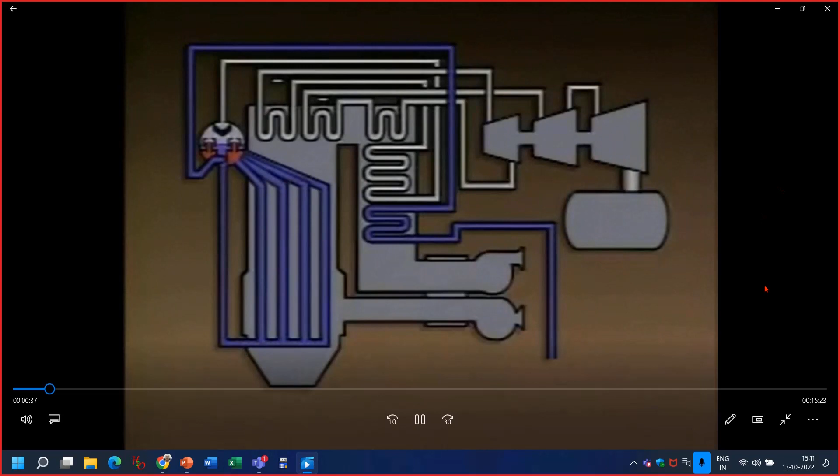In a typical drum-type boiler, the water flow path includes an economizer, the boiler drum, downcomers, headers, and the boiler tubes. The water that is supplied to a boiler is called feed water.

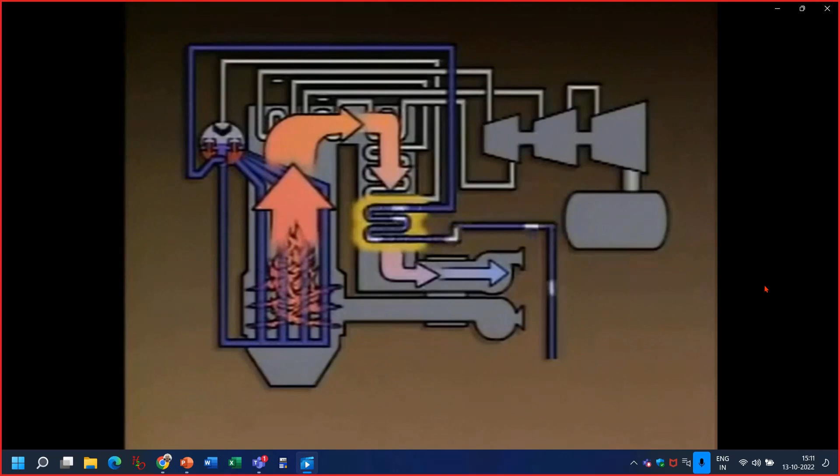The first component that the feed water passes through is the economizer. The economizer uses heat from combustion gases that would otherwise flow out of the stack to heat the feed water. Heating the feed water means that less fuel has to be burned in the furnace to convert the water into steam.

In this boiler, the heated feed water flows from the economizer and enters the bottom part of the boiler drum through the feed water inlet. The water continually circulates within the boiler through the downcomers, the lower headers, and the boiler tubes.

A boiler typically has two or more downcomers and two or more headers. However, for clarity, this illustration shows only one of each. The lower headers supply water to the bottoms of the boiler tubes. The boiler tubes, which line the inside walls of the boiler furnace, are commonly called water walls.

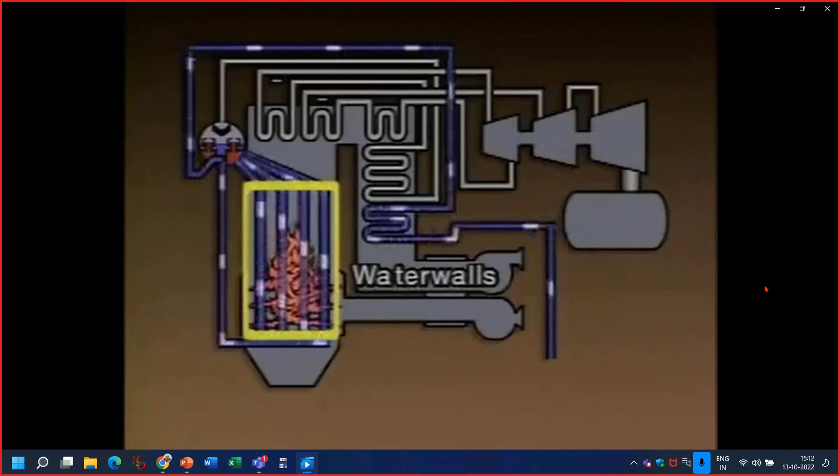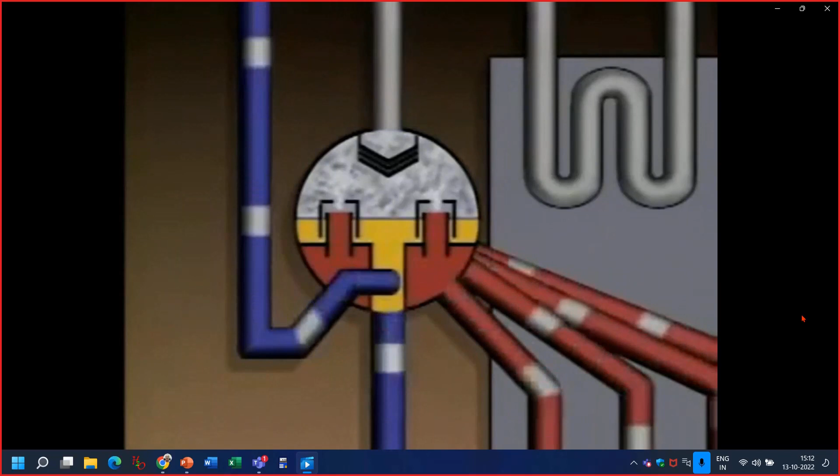The water walls are exposed to the heat produced by burning fuel. As water flows up through the water walls, heat turns some of the water into steam. The mixture of water and steam rises until it enters the boiler drum, where it's separated into water and steam. The steam rises to the top of the drum, and the water remains in the bottom. The water is then available to recirculate through the boiler.

The flow of water through some boilers occurs by means of natural circulation. The key to understanding natural circulation is the fact that cold water is heavier or denser than hot water or steam.

In a boiler, the mixture of water and steam in the water walls is hotter than the water flowing from the drum through the downcomers. This is because the water walls are heated by the burning fuel in the boiler furnace.

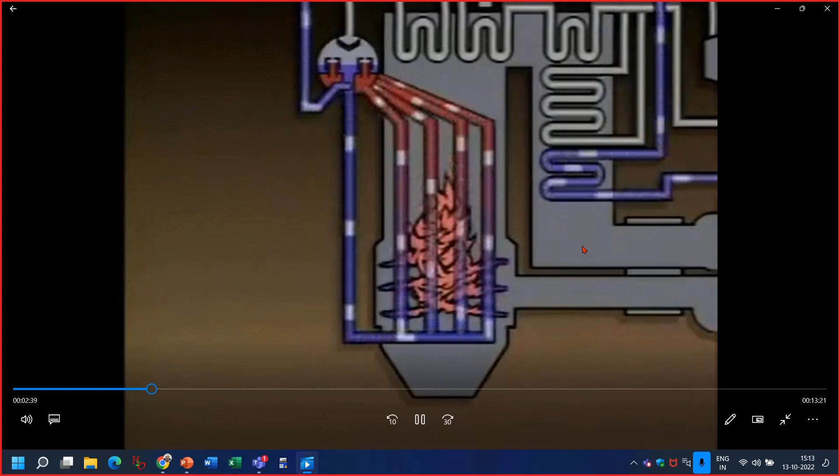As the mixture of water and steam rises, cooler water from the downcomers flows into the lower headers and then into the water walls. The cooler water is also heated and rises, creating a self-sustaining flow through the water side of the boiler.

Natural circulation of water in a boiler is affected by two factors: the amount of heat produced in the boiler furnace and the pressure at which the boiler operates. For example, raising the temperature in the boiler furnace increases natural water circulation.

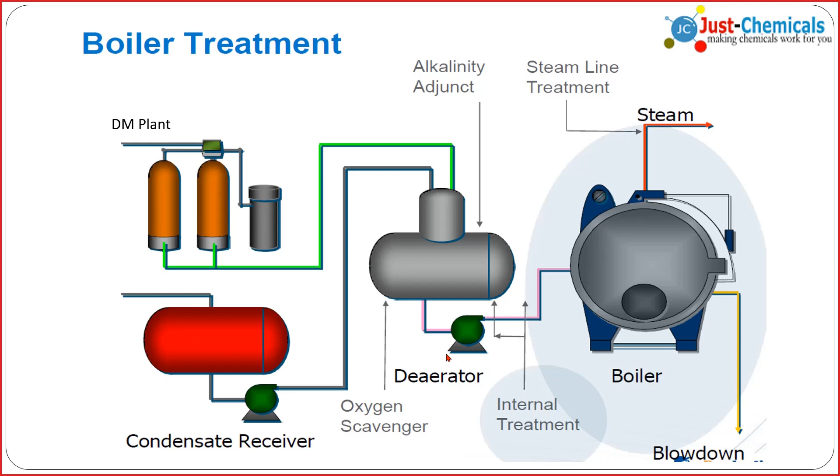So that's how we go with the system, that a boiler water chemistry or power plant chemistry system always will consist of one DM plant, a water treatment plant consisting of anion, cation, or RO, MB or RO-EDI, something like that, which gives the boiler makeup water to the boiler, and the boiler will generate steam to run the turbine. This is a very common picture of a small boiler, but you may be running higher pressure boilers, maybe 100, 120, 135 kg pressure boilers for your plants.

Your cement plants normally have a problem of cycling, which we call sudden pressure. One kiln is down, so you have to reduce the boiler steam generation, and there will be a sudden drop in pressure and everything, and then you have to bring it up again. So ramping up and ramping down time is a problem for a cement plant. I've seen a few plants where there are 4 or 5 kilns, and even one kiln down means they are already 25 megawatts down. That is one of the problems you may be facing, which I know.

But there are several other problems in any power plant chemistry, in the water treatment department, and in steam water cycle chemistry. Today we'll mainly focus on the steam water chemistry, and then I will also take your questions one by one within this time frame, so that we can talk upon that.

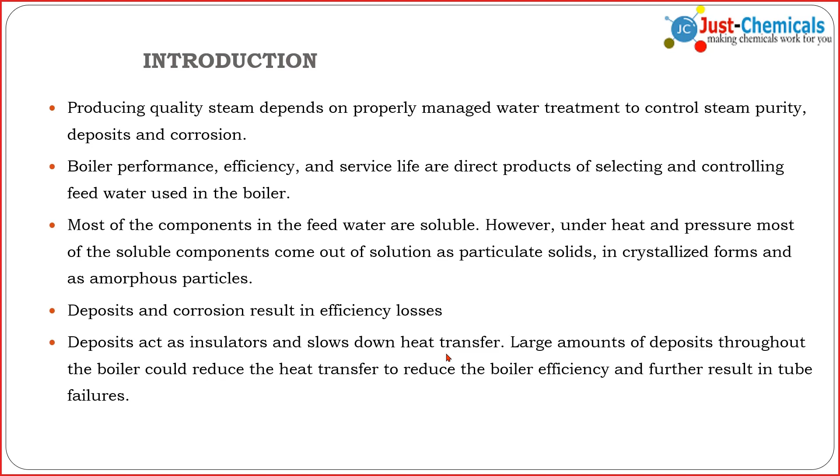Now we'll talk about some important points in steam water cycle chemistry. We know that deposits and corrosion result in efficiency loss of a boiler, and deposit and corrosion on the turbine blades also cause loss in efficiency of the turbines.

The first point you must know is that EPRI is the standard for all power plants—Electric Power Research Institute America—which also governs NTPC water chemistry, and not only water chemistry, NTPC follows EPRI for all mechanical, C&I, and everything. Before 2003, we were following VGB Germany, and that still exists. VGB is also a standard company which Europe follows entirely, and Europe and some part of Australia still go with VGB.

Though VGB and EPRI are not very different, both will say that DM water will be called DM water only if the conductivity is less than 0.1 microsiemens per centimeter in the online conductivity meter. So if you have 0.2, 0.3, 0.4 microsiemens of conductivity in the DM water in the online conductivity meter, that means you are actually not having technically correct DM water with you. That is the most important point which water treatment fellows will not tell you, because either they themselves may not be knowing, or they may be hiding it from you.

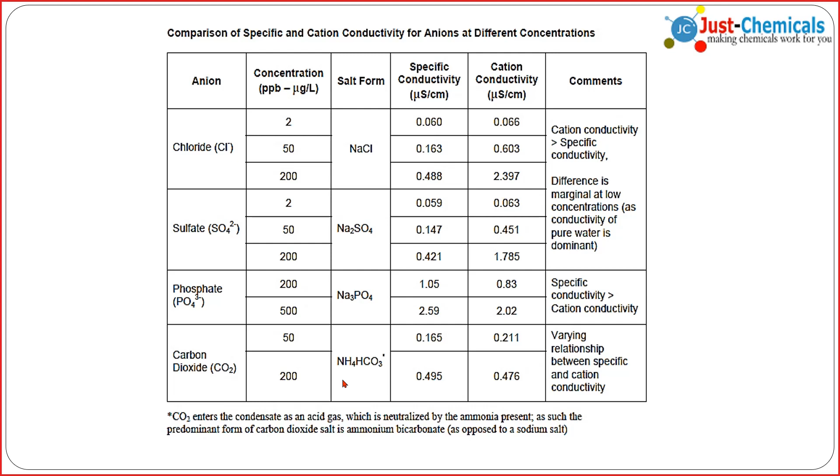So these are the four contaminants which are very important, and here is the relationship. Once you get these slides, please make it convenient for your people also to know what contaminants can do to your conductivity. But from all these things, the important point to note is your DM water will be called DM water only if it is having 0.1 microsiemens per centimeter of conductivity. If it is having more, that cannot technically be called DM water.

Here is another chart which tells you concentration versus the cation conductivity. If there is 16 ppb of chloride, the cation conductivity could be 0.2. Sulfate at 21 ppb will cause a cation conductivity of 0.2. Similarly, from acetate and formate - from where can these acetate and formate come?

It can come from morpholine if you are adding it in the system. People make this mistake regularly because of lack of knowledge that morpholine thermal degradation will give acetates and formates in the steam water cycle, which are actually corrosive to the steam water system. So acetates and formates come from your morpholine, or if you are using other cyclohexylamine, or MEKO or DEHA - at that time also these will increase the conductivity. So we will never be able to reach below 0.2 conductivity when you are using morpholine, cyclohexylamine or DEHA. So believe in simple chemistry.

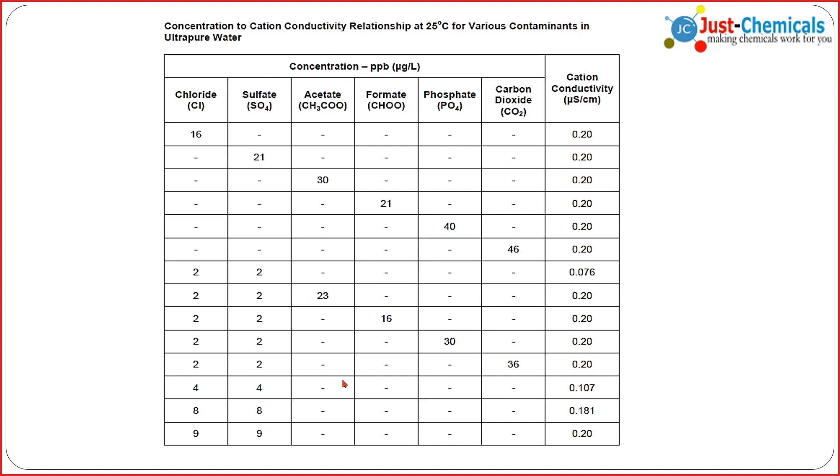Then phosphate, if it is there at 40 ppb, can raise the cation conductivity to 0.2, and carbon dioxide at 46 ppb can raise cation conductivity to 0.2. These are reference slides for you which you can use, and you can also make algorithms like me to figure out what could be the possibilities.

Now coming to the center, the core of the training - there are two important types of treatment: one is internal and another is external. First is external, like demineralization. There could be several configurations depending on the raw water quality available. The plants which are near the sea would be having a desalination plant followed by second pass RO and then followed by a mixed bed, or maybe a train of cation, anion, mixed bed

with a degasser. Whereas the hinterland plants, like those in Tadipatri, they may be using surface water and may have a conventional DM plant, or otherwise they can have RO plus mixed bed or RO plus EDI. Like in the Hyderabad region, most of the pharmaceutical plants are having RO and EDI because they want ultra pure water. Even the steam water cycle also requires ultra pure water. So now the trend is going towards RO and EDI. EDI means continuous electro-deionization system.

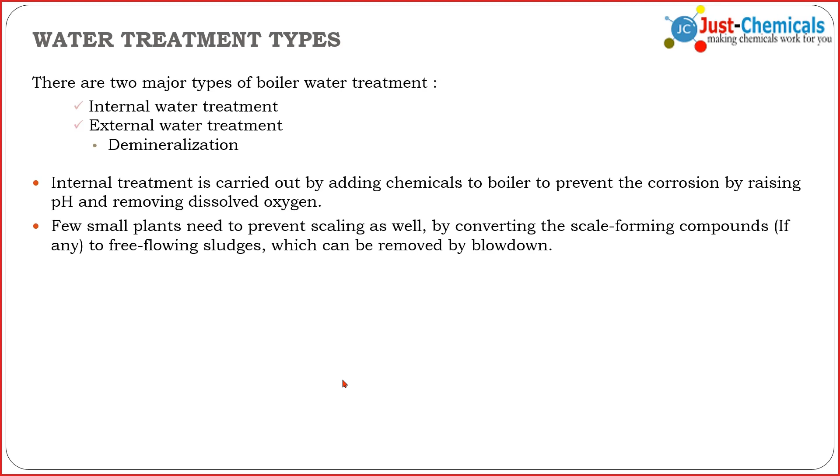Now we go into the external water treatment. The external water treatment may be having ion exchanger, a demineralizer, or a reverse osmosis.

I hope you all know how the ion exchanger works. The ion exchanger works as cation and anion separate resins are used. The cation resins will exchange cations from the water. Like if the salt is NaCl, the cation will be sodium Na and the anion will be chloride Cl. Similarly, if it is calcium carbonate, calcium will be the cation, carbonate will be the anion.

So ion exchange resins are also having two types. One is cation and one is anion. Cation resin will take care of the cations. It will take the cations from the water and release hydrogen in the water.

Cation is placed before anion resin beds because for exchanging anions, the anion resin will need some mineral acidity. It cannot simply exchange anions from the water when bigger cations are also available. So people ask this question many times, why cation resins are before anion resins? The cause is that anion exchanger needs mineral acidity to exchange the anions, and that is why the anions are placed after cations.

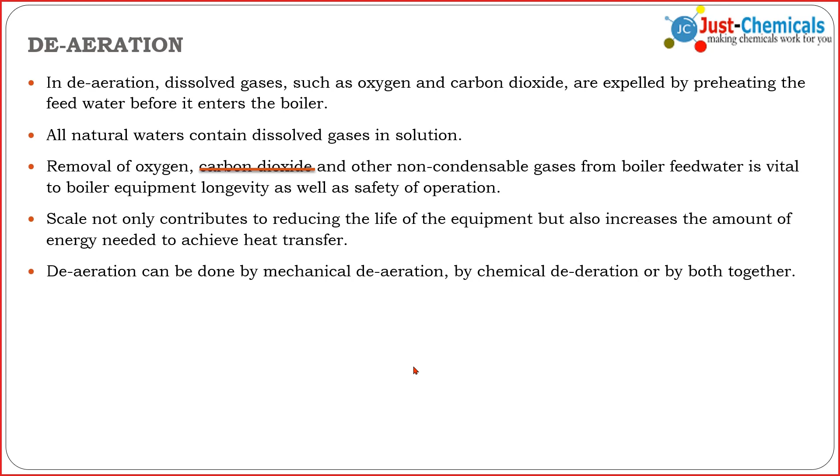Now, mechanical deaeration, as I told you, makes it very much possible to get very low ppb of oxygen content from the deaerator, especially the pressure deaerator. In modern times, deaerators are designed so that outlet oxygen should be less than 7 ppb. The vacuum type deaerator works at about 82 degrees centigrade and can reduce oxygen content in the water to 0.02 milligrams per liter. Vacuum pumps are used to eject the steam required to maintain the vacuum. The pressure type deaerator works at more than 105 degrees centigrade and can achieve an outlet oxygen content of around 5 ppb, or 0.005 ppm milligram per liter.

Then you may ask, why do we need chemical deaeration in that case? Yes, your question is very correct. If we are achieving the desired oxygen level in the deaerator itself, why do we need chemical control for scavenging or deaerating the oxygen? We may actually not require it, if we are measuring at the inlet and outlet. But still, to maintain that magnetite layer intact, we need about 10 ppb only.

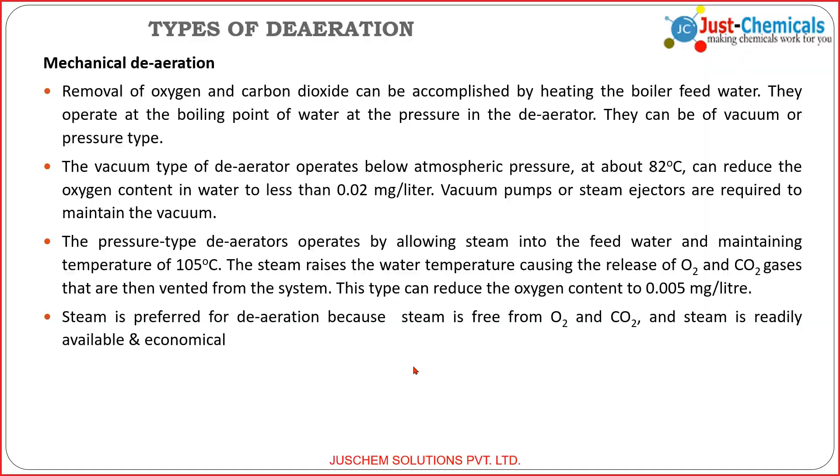Now, when we talk about this, we should also talk about... hello, somebody is actually unmuted. No, his background sound is coming. May I request him or her to please mute themselves unless you have a question to ask. You can ask any question at any time. Nak ma'am, would you please mute yourself? Nak ma'am, can you please mute yourself?

All right, we go back. So steam is actually the preferred deaeration method in mechanical deaeration systems. Steam is pushed from below, from the spargers, into the incoming water, so that it can remove the CO2 and O2. That is what mechanical deaeration does. CO2 can only be removed from the makeup water, not from the water which has already formed ammonium carbamate.

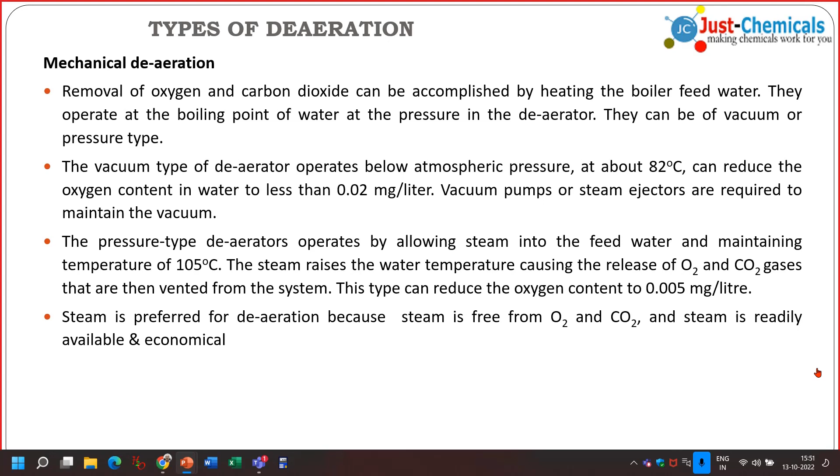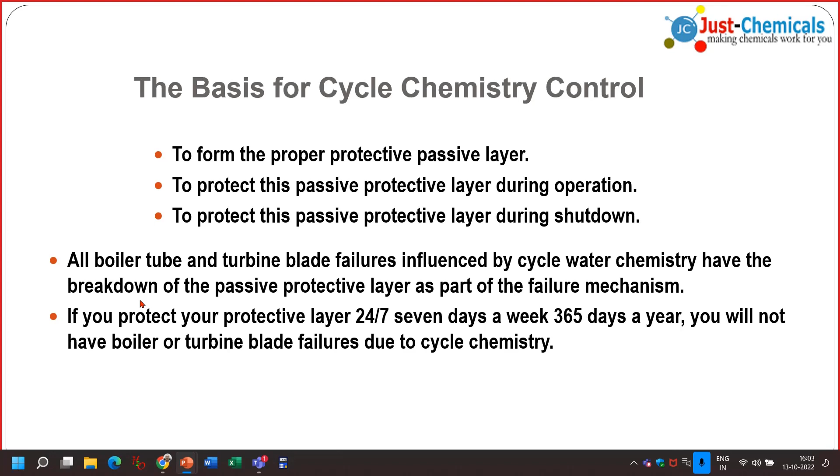So the basic point is that if we are protecting our protective layer 24 into 7, 365 days, we will not have any boiler failure or turbine failure because of the cycle chemistry.

Now we'll talk about the very basic pH and dissolved oxygen. Many people, even after doing BOE, may not be able to pinpoint the answers. Why do we keep high pH?

People will say because low pH is acidic and high pH is alkaline, and acidic conditions will corrode. But how does the acidic pH corrode? If I do a why-why analysis on this, then I will ask why low pH should corrode - mostly people will not have any answer. Few people may have. Similarly is with dissolved oxygen.

Now I'll take you to the real actual scenario, and it is being published by CEGB long back in 1972 itself.

First, these are the parameters which we are looking at in the boiler: pH, dissolved oxygen, phosphate conductivity, and one of the systems you need to incorporate into your system is strong acid cation conductivity, also known as cation conductivity. It's merely a small cost, but it gives a lot of information of the impurity in your water - in the DM water, in the feed water, in the saturated steam, and the main steam.

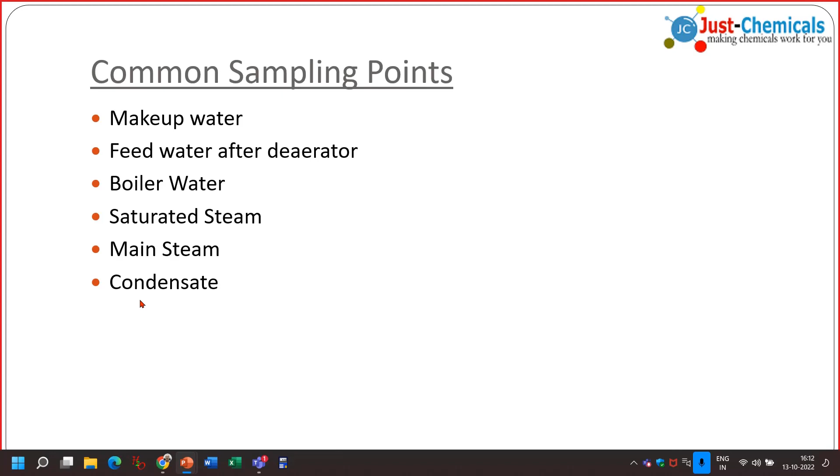And to analyze, you all know you should have a SWAS system available. SWAS means Steam Water Analysis System. This should always be available in your plants, because you cannot always depend on a timed sample.

There may be a human error of sampling, maybe a contaminated sampling bottle, maybe a human error at the lab, maybe a human error with instrument calibration. You cannot depend on that. You need something online where you can always be aware that your operations are going well.

That is pH. It should be mostly online, even in condensate it should be online. If it's not there, it's okay, but you should be having all these things online.

Dissolved oxygen you should always have online in the feed water and condensate, and you should have a cross-checking methodology for dissolved oxygen with a handheld oxygen analyzer, sometimes known as Orbisphere, though there are other makes also. You take it to the sampling position, plug it into the tubes, check the sample dissolved oxygen, and tell C&I whether your dissolved oxygen meter is correct or incorrect.

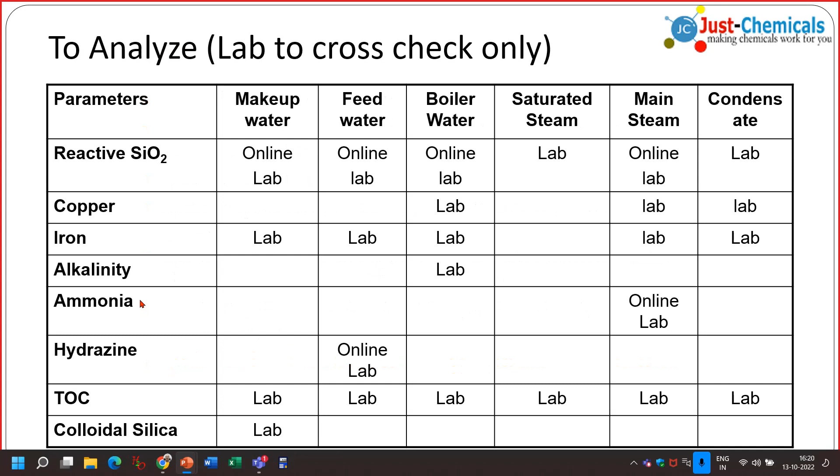That is how in the movie Three Idiots, the character Chatur says it is a negative log of hydrogen ion concentration. How many people understand that? Not all, right? Maybe some engineers will understand 'negative log' and 'hydrogen ion concentration,' but they will not know the unit of that measurement.

So I'll take you to the basics. Water is actually a very weak electrolyte. That is why it has a conductivity of 0.054. Conductivity cannot go to zero for water. It is slightly ionized always, so it tends to separate out as H+ and OH- within the water system.

At 25 degrees centigrade, if the water pH is 7 in pure water, the H ions and OH ions both will have 1 into 10 to the power minus 7 gram ion per dm cube each. Hydrogen will be 1 into 10 to the power minus 7 gram ion per dm cube, and hydroxyl ion also will be 1 into 10 to the power minus 7 per decimeter cube.

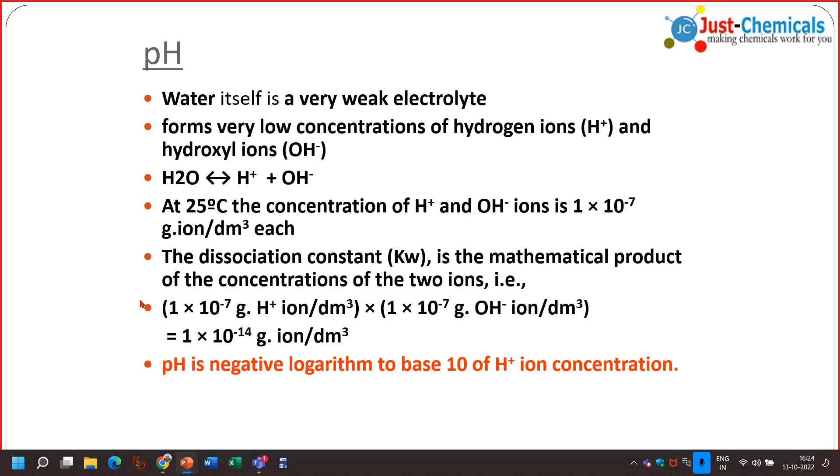So pH 6 means 1 into 10 to the power minus 6, and pH 8 means 1 into 10 to the power minus 8. Now which is bigger, higher concentration? Definitely 10 to the power minus 6 is the higher concentration than 10 to the power minus 8. And the scale is logarithmic, so a decrease in pH value by 1 unit corresponds to a 10-fold increase in hydrogen ion concentration.

And what is the unit of this? Gram ion per dm cube.

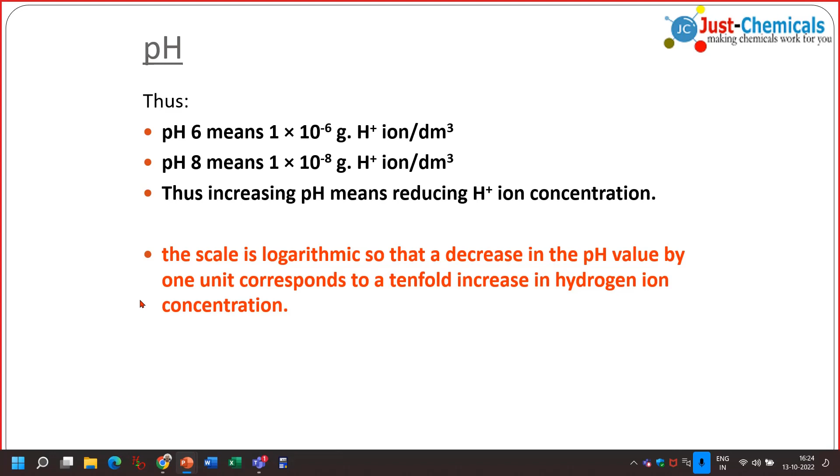Now let us understand the corrosion cell, and from the corrosion cell we'll understand the implication of hydrogen and oxygen into this—we'll understand the implication of pH here. The corrosion of metal is essentially an electrochemical cell formation where there'll be one anode and one cathode. Let us consider the Daniell cell, where zinc is there and a copper electrode is there.

Both electrodes are there. Zinc becomes the negative electrode and anode, copper becomes the cathode, and there is a copper sulfate solution, and here is zinc sulfate solution. And this cell starts working—it's not polarized, it's depolarized.

It starts working. At that time there will be an anodic reaction where the zinc will come out into the solution, and there will be a cathodic reaction in this Daniell cell where copper will deposit on the cathode from the copper sulfate solution. There will be electron flow, and wherever there is electron flow there will be some current generation, right? This is the Daniell cell.

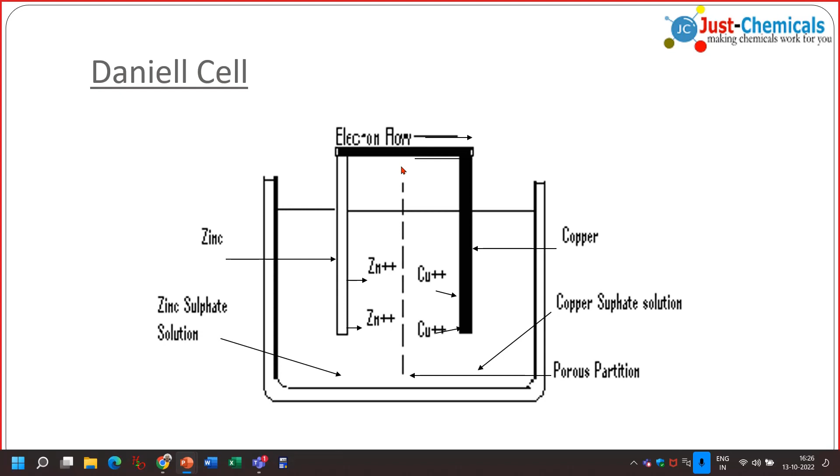Now in this Daniell cell we have two reaction rates. One is the anodic reaction rate, which is zinc minus 2 electrons giving zinc 2 plus in the solution. That means zinc is corroding because of its low electronegativity, and the electron is traveling from the outer path to the cathode. At the cathode, the copper from the solution plus the two electrons traveling from the anode will be deposited on the cathode.

That is the cathodic reaction. And remember, in any corrosion cell and any electrochemical cell, the anodic reaction rate will be equal to the cathodic reaction rate. If you reduce any of that, you will have a reduction in corrosion.

Either you replace the zinc electrode with something else which is not corrosive, or else you remove that copper sulfate and copper—but still you have to stop the cathodic reaction, because the cathodic reaction may not always be the same, it will change always.

Somebody is unmuting in between. Is this Umesh Babu? Umesh Babu, can you mute yourself? Or do you want to say something?

So now, for any electrochemical cell to complete, you need both anodic and cathodic reactions in place. Like in Daniell cell, you had both zinc and copper as anodic reaction and cathodic reaction. Zinc giving 2 electrons and dissolving inside the solution as zinc 2+ was the anodic reaction, that was corrosion, and copper depositing from the copper sulfate solution was the cathodic reaction.

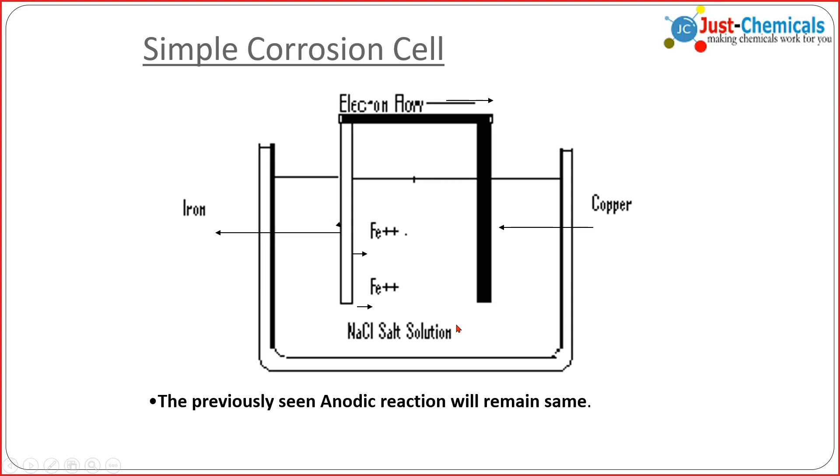Now when we have removed the zinc electrode and replaced it with the iron electrode, and removed the copper sulfate solution with common NaCl or Na3PO4, then in this solution we have copper as electrode or cathode, maybe of higher electronegativity, and the lower electronegativity iron available as anode, with a common solution such as NaCl or Na3PO4 or any other electrolyte.

Then also the anodic reaction may happen, Fe minus 2 electron giving Fe2+, even if copper is not there to get deposited in the cell, because there will be some other cathodic reaction which will be assisting it. So let us find out what are the cathodic reactions possible.

The one cathodic reaction which could have been there is sodium deposition, if sodium had a lesser potential to deposit. But sodium cannot deposit as it requires a very high potential. Fe deposition would imply that this cell is in equilibrium, is polarized, and the electron will not flow. So Fe deposition is also not possible.

So what is possible? The possible reaction is the availability of hydrogen ion in the system, and where does the hydrogen ion come from? It comes from the pH of the solution. pH means negative log of hydrogen ion concentration - that is the scientific definition.

In real common sense terms, the hydrogen ion concentration is higher whenever the pH is lower. So when we maintain a pH of 9 or 10, the concentration of hydrogen ion is lower. When the concentration of hydrogen ion is lower, this cathodic reaction which may have happened - 2 hydrogen plus with 2 electrons traveling, evolving hydrogen gas from the system as a cathodic reaction - could be avoided at pH 9 to 10.

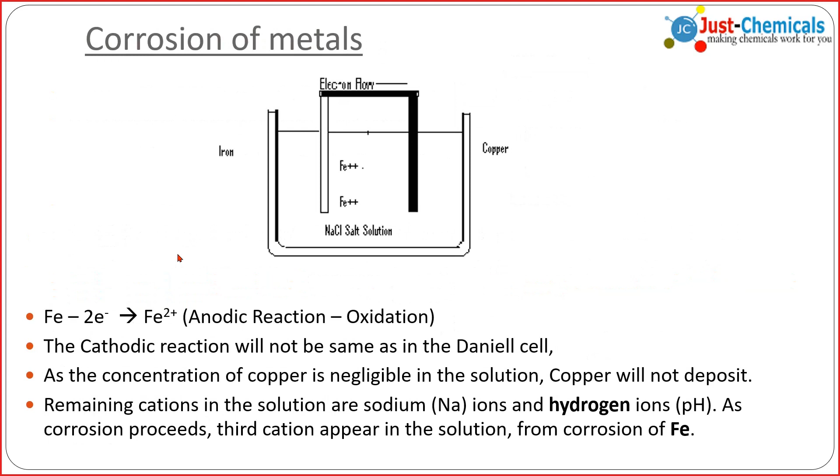I hope it is now clear that by reducing the cathodic reaction rate of hydrogen ion converting into hydrogen gas, and oxygen, dissolved oxygen converting into hydroxyl ion, by reducing these cathodic reaction rates, we are now able to reduce the corrosion rate of iron within the boiler system. Is it okay to understand, or do you want to deep dive into it more? Do you have any question here?

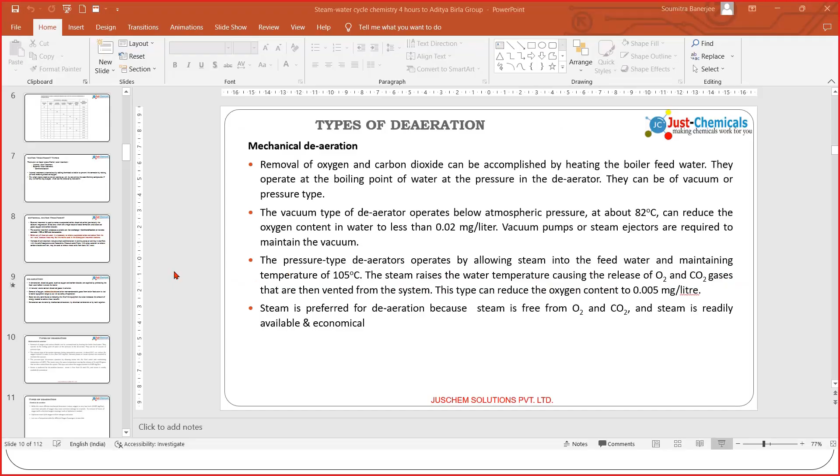Hello? Was this okay with you to understand? Has everybody understood this, or do they have some questions still? Or do you want to go through the slides later and then come back to me?

Anybody else wants to tell anything? There are 35 participants plus HR in this meeting.

Now, whenever people ask you what was the cause of why you keep high pH in the boiler water and why you keep lower DO in the boiler water, I hope you will all be able to answer that you want to reduce the cathodic reaction rate which causes the anodic reaction rate of corrosion. By reducing oxygen, you are reducing the cathodic reaction rate of formation of hydroxyl ion, and by reducing hydrogen, you want to reduce the rate of cathodic reaction of hydrogen gas formation.

So is it clear to everybody? Any question from anybody? That's okay, sir. Okay, that's great.

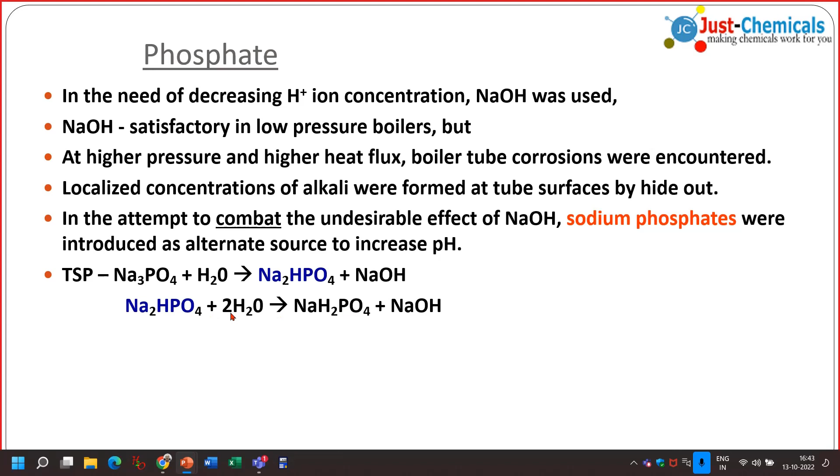But the very nice part is that at a pH of around 10.3, it acts as a buffer, and rather than moving towards the right, the reaction reverts back to the left at a pH around 10.3. This is the difference between sodium phosphate and other sources of caustic, that this reverts back

to the original form. But at higher phosphate levels, like in boilers below 105 kg per centimeter square pressure, if the phosphate is maintained above 3.6 ppm, or in boilers above 105 kg per centimeter square, if you're maintaining phosphate above 1.5 ppm, then this phosphate along with the water will go beneath the protective layer, beneath the magnetite layer, and will form maricite. That maricite will form acid phosphate corrosion that looks like a bathtub ring formation, or a railroad track pattern, and it will be more prominent in the rifled tube sections.

So in this case, if acid appears in the boiler due to condenser leaks or due to any other thing, or formation of other acids, like chloride, if it is there in the boiler water, what will happen? Chloride will form FeCl3. FeCl3 will dissociate into Fe(OH)3 and HCl. The acid will appear, and at that time NaOH can react with that acid and neutralize it.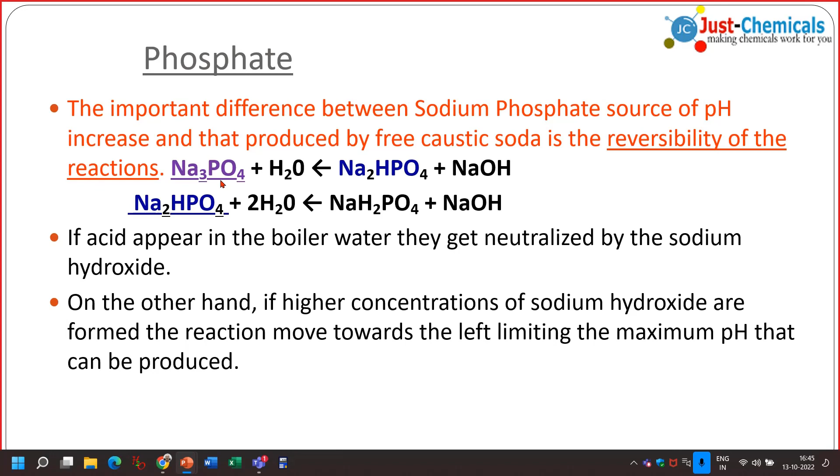And if more hydroxide is there in the water, then it will try to revert back into disodium hydrogen phosphate and then into trisodium phosphate. This is the big, good part of phosphate, and the bad part of phosphate is we can't have much of it in the system. We have to reduce it to a certain level.

Now, conductivity, as I told you, the purest water conductivity is 0.054. Has anybody told you this before? Maybe you can find out on Google. DM water will be DM water. As per EPRI, it is 0.1 microsiemens per centimeter, while VGB Germany says it is 0.8 microsiemens per centimeter.

Conductivity is a measurement of electric conductance. 1 upon conductivity is equal to resistivity. So the purest water will always have high resistivity, and electrical current will not be able to pass through pure water.

So conductivity will be contributed through the dissolved solids, though people measure TDS through conductivity. They say conductivity into 0.64 is equal to TDS. But that is not always true, because in boiler water systems you have ammonia and hydrazine, which are volatile and are not actually solids, but conductivity is being imparted by ammonia and hydrazine. So that is not always true.

But yes, gases will contribute to the conductivity, and higher conductivity means the corrosion reaction will be higher, because conductivity will be there in the electrolyte. In the electrochemical cell, there's an anode, cathode, outer metal connection, and beneath that there will be electrolyte. If the electrolyte conductivity is higher, then the current flow will be higher.

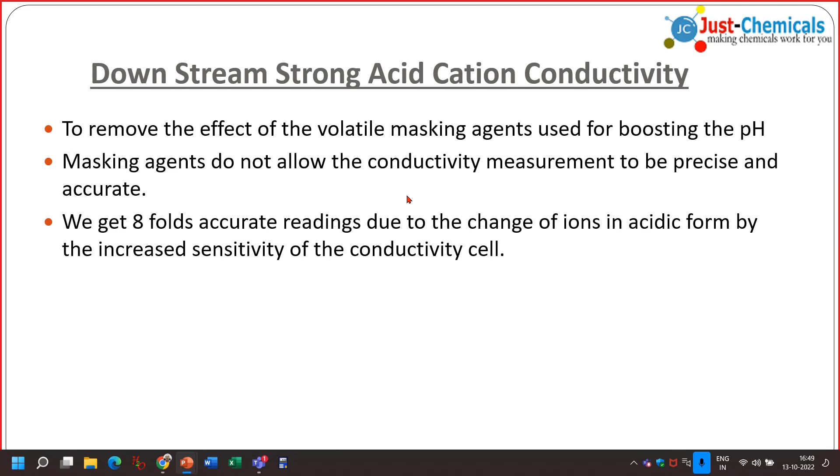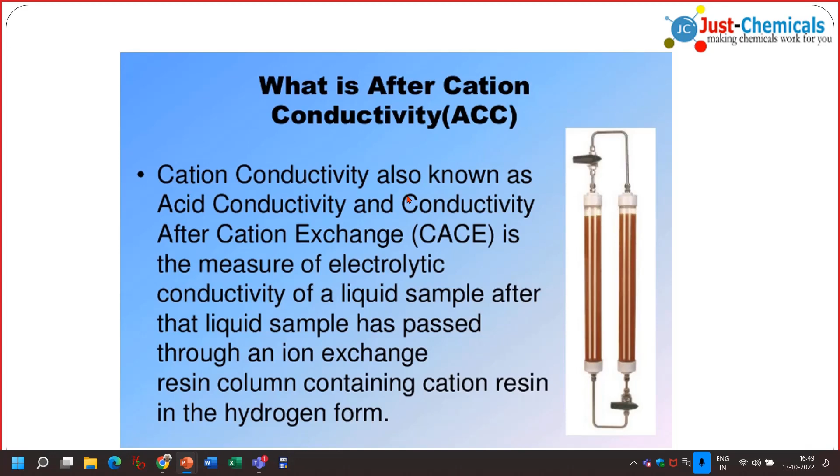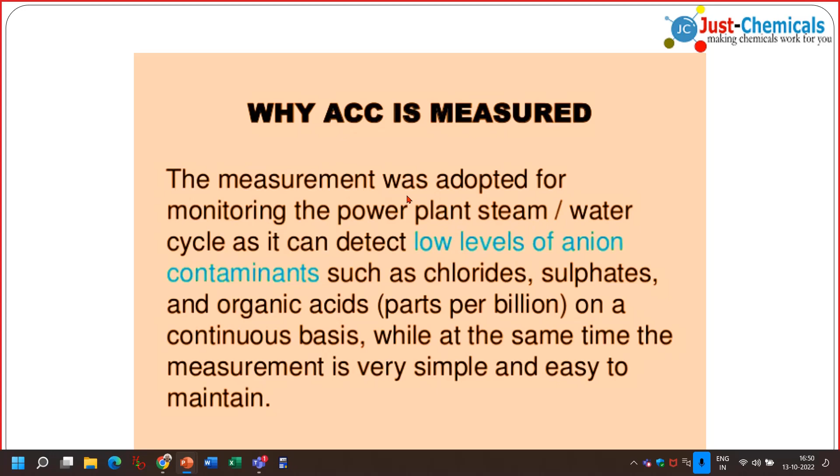This is the cation conductivity column, also known as CACE, conductivity after cation exchange. We measure conductivity after these columns. It will tell you the low levels of anion contamination like chlorides, sulfates, and other things. It will increase the conductivity levels whenever chlorides and sulfates appear in the stream or water samples. There are now color changing resins available to fill up these cation conductivity columns. Once filled with regenerated resin as violet or black, upon exhaustion it will become red, so you can change the resin at the time of need. Otherwise, you will have ambiguity whether the resin is bad or the sample is bad. To avoid that ambiguity, you need a color indicating resin in the system.

Now chlorides. As I told you, chlorides will not become HCl directly. It will first attack iron, becoming FeCl3, then FeCl3 plus 2H2O gives FeOOH plus 3HCl, and then this HCl will again react with the iron and form FeCl2 plus H2. This is the worst part, because the presence of chloride is cyclic. You can't stop corrosion when chlorides are present in higher quantum in the boiler steam water cycle.

Germany and European guidelines say you should have zero or nil chloride in the system, but actually the water chemistry available in India cannot say we will have zero chlorides. Europeans may have that, because it is all snow or glaciers melting and coming out, so they may be devoid of chlorides. But in India, since we use surface water, our rivers have chlorides, our groundwaters have chlorides. We cannot avoid chlorides in India, so we follow EPRI guidelines in this case, having 2 ppb to 5 ppb, that is 2 micrograms per liter to 5 micrograms per liter. Remember, ppb divided by 1000 is ppm, and ppm into 1000 is ppb. So micrograms per liter is too low a level to be measured in our labs for chlorides, but still we can try in our spectrophotometer to make a graph of such a low level.

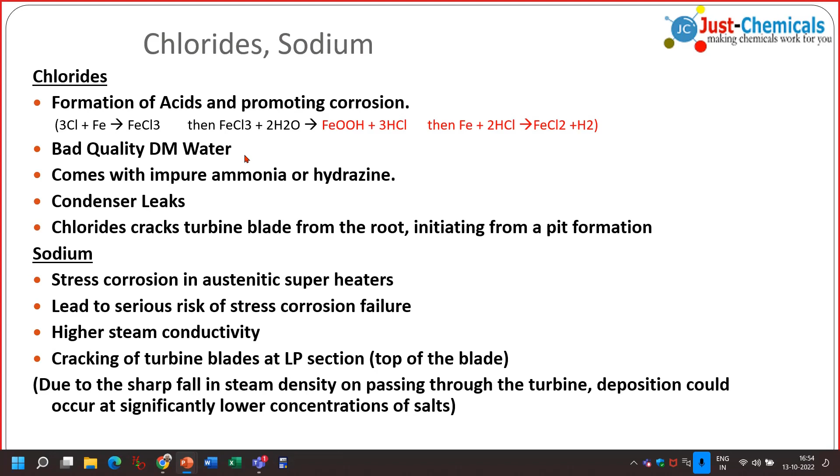Now we come to reactive silica. Silica could deposit in the turbine blades, but it will never crack the turbine blades. It can only cause slight disalignment, increasing your steam consumption per megawatt generation and loss of output generation capacity, because silica has a significantly higher partition coefficient. At pH 9, 1.25% of the boiler water silica will anyway get carried over with the steam, and at pH 10 it will be 1.02% of boiler water silica carried over in the steam. But silica is not as harmful as chloride, sulfates and sodium. Sodium, chloride and sulfates are very harmful for the turbine blades; silica is actually lesser harmful.

In any shutdown, every 2 years or 4 years, you do glass bead blasting, which removes the silica scale from the turbine blade, so you can come back to original generation capacity. But once the turbine blade is cracked and dismantled, you will have a longer shutdown period and longer time to repair and come back to its original position, because there will also be a resonance check after turbine blade replacement. Turbine blade replacement is not a small and simple case; it is a huge task because turbines are very sensitive to resonance as well.

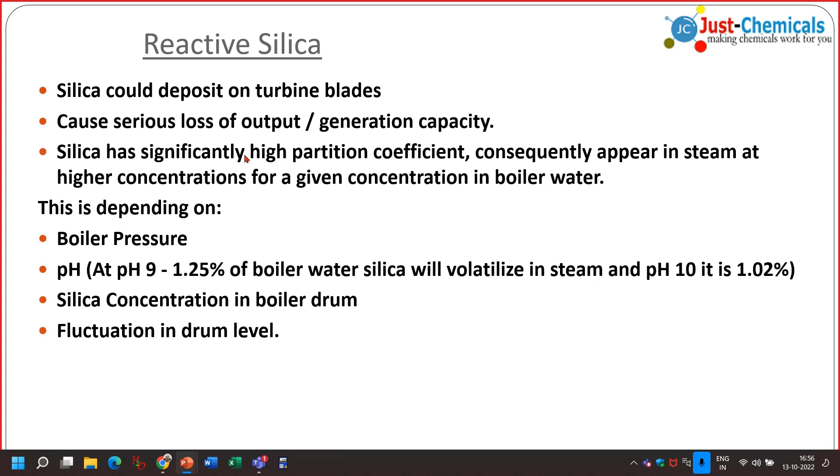Then we come to the colloidal silica part. Colloidal silica, as I told you, converts into reactive silica above 130 degrees centigrade. This is called colloidal silica or non-reactive silica because we cannot measure it through our normal procedure of adding acidified ammonium molybdate, since it does not react with it. We have to digest it in presence of high pH to get it converted into reactive silica.

We can do the same thing in a boiler. We can add very pure ammonia and digest it, but ammonia in our digestion system will escape into the atmosphere. That is why I said use silica-free sodium carbonate addition. You could add silica-free sodium phosphate, but sodium phosphate will again interfere in the silica estimation. So it's better to use silica-free sodium carbonate.

Colloidal silica is mostly polymeric. In cooling water systems, just deviating from boiler water for a moment, you will see that silica cycles of concentration are always lower than magnesium COC or calcium COC. Why? Because it polymerizes inside the cooling water system, and since you are not checking total silica, you won't be able to know the actual silica COC.

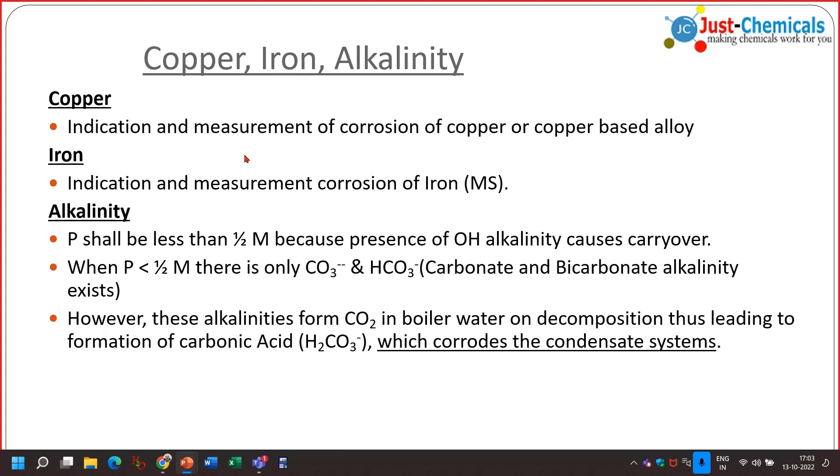Ammonia neutralizes carbonic acid. Whatever CO2 comes into the system without getting removed reacts with ammonia and becomes ammonium carbamate. Ammonium carbamate cannot be removed through the deaerator because it defeats Henry's law. Henry's law is not applicable on ammonium carbamate, though it may be a volatile thing, but it remains in the water only. It does not get liberated with the temperature.

Ammonia is a volatile alkalinity booster. You should not use morpholine in any case. The disadvantage is only to copper solutions, the systems which are having copper or copper alloys. There, with pH of more than 9.5 and in presence of high DO, the copper could corrode.

With hydrazine, there are all advantages. It is said that it is carcinogenic, but there is not a single reported case in India that anybody has suffered cancer due to hydrazine. If there is a report you find anywhere, please share it with me. I will go through it, because I believe, NTPC believes, Adani believes, Tata believes, JSW believes, America believes, Australia believes, Japan believes that hydrazine is the best option of oxygen scavenger. The next option is MEKO.

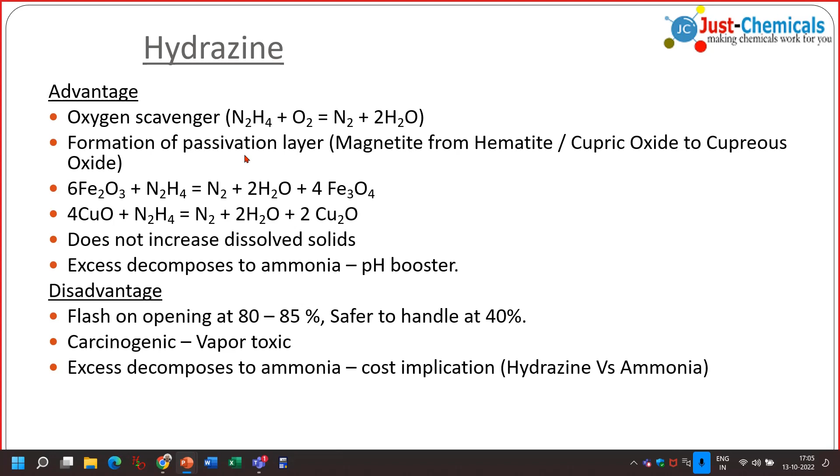So why should we not use morpholine? We should not use morpholine in any case, because morpholine degrades into organic acids like acetates, formates, glycolates, and propionates. The thermal degradation product will always be an organic acid. That is number one.

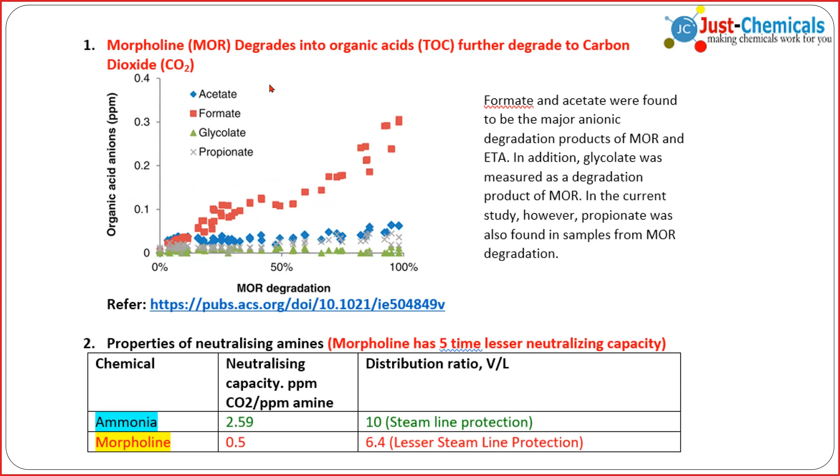Number two is its capacity to neutralize carbon dioxide. Ammonia can neutralize 2.59 ppm of carbon dioxide, while morpholine can only neutralize 0.5 ppm of carbon dioxide. So there is a cost implication as well due to the consumption. While pH adjustment, you'll see 0.5 ppm of ammonia can take you to 9.2 pH. In the case of morpholine, 8 ppm of morpholine would be required to reach pH of 9.2.

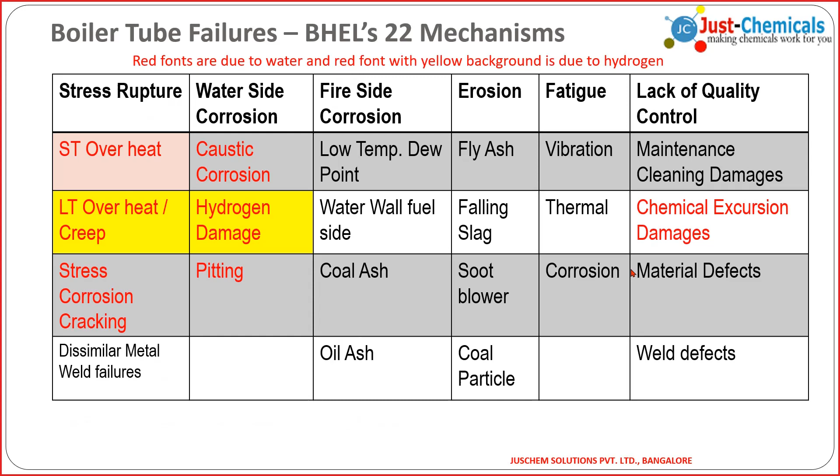Now, actually, the problem with DEHA is having undesired organics in the water.

You see here acetates and acetaldehydes - those are undesired. For preservation purpose only, I admit that. So for preservation purpose, you can add sodium sulfite. Does that act very fast, sodium sulfite, sir?

The reaction rate of DEHA is good, but it may not react below 82 degrees centigrade. But sodium sulfite is the only chemical which reacts at room temperature. There is no other chemical which reacts with oxygen at room temperature. That is why I am saying this.

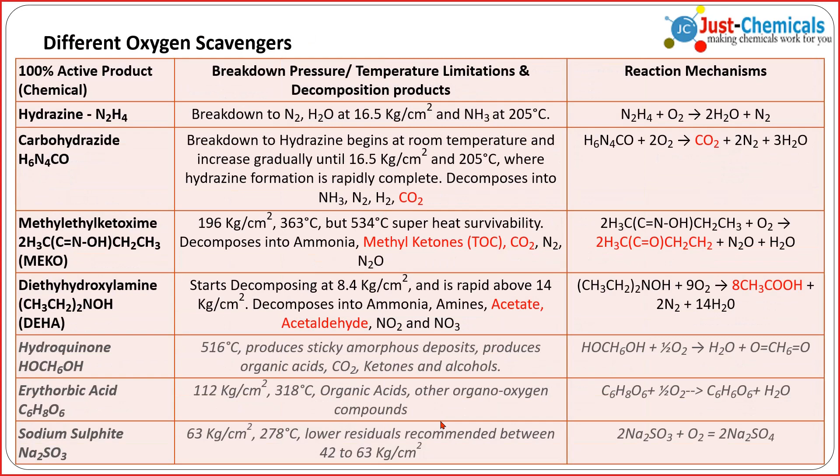How much do we have to maintain, sir, for sodium sulfite? If you can measure the dissolved oxygen - no, for preservation purpose, you just have to optimally maintain 10 ppm. That's all, 10 ppm is enough, sir.

But you need to drain down your boiler completely and wash it after the shutdown. Normally we are not doing that - we are doing wet preservation. For that, we are adding DEHA and cyclohexylamine, sir.

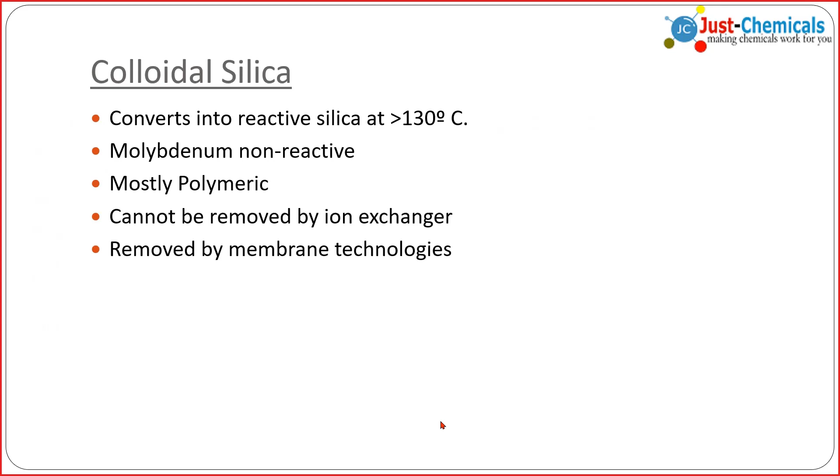Can you not do this - empty the boiler from high pressure? Okay, I will try, sir. Just find out the sodium sulfite option, I'll show you, I'll come back to that.

I can supply you the EPRI guideline for this. After emptying, do we have to fill nitrogen, sir? No, after emptying, you have to close all the valves properly. So is it possible to drain the entire water in the boiler, sir?

I don't think so - there will remain a few non-drainable portions, especially in the LP heater and HP heater. If you can isolate them, it can be completely dried. Only LP heaters and HP heaters have some non-drainable portions. Otherwise, the complete boiler is drainable, right?

Downcomers, water walls, all these are drainable, right? Your lines too. Only the heaters coming in place - the LP heaters, HP heaters, and also reheaters - if you are having reheaters, normally your size of boilers may not be having reheaters, but if they do.

There you fill high pH water and keep it like that. Compared to this, sodium sulfite is better, sir - we can go for sodium sulfite. But how do we ensure whether it's drained or not? We need to discuss this a little bit more together.

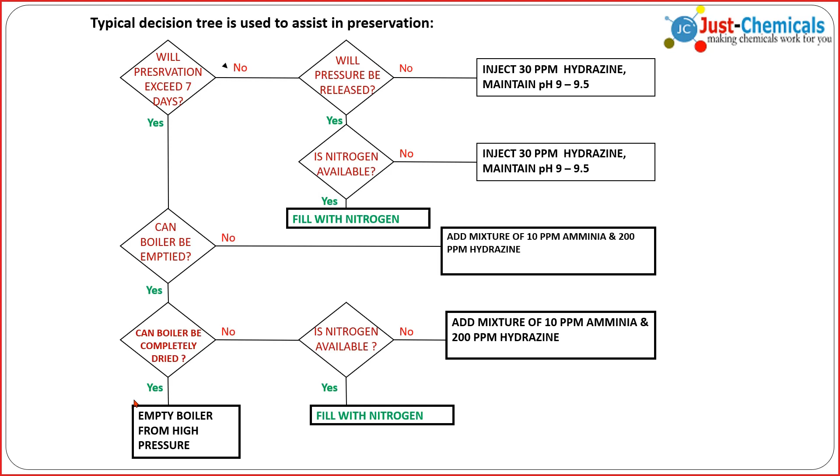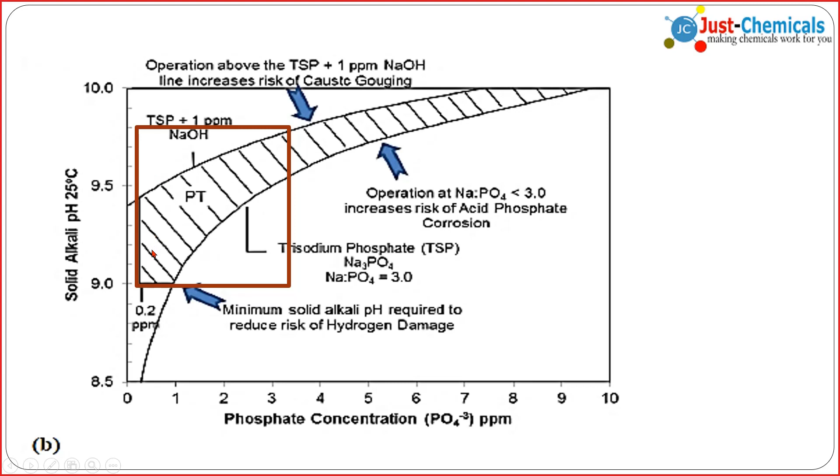So now in the modern treatment systems, we need to maintain our system into this range. If you are below 105 kg per centimeter square boilers - the pressure rating is below 105 kg per centimeter square - then you need to maintain your phosphate levels and pH levels in this concentration. Phosphate up to 3.6 and pH up to 9.8, and you will be happily surviving without any problem.

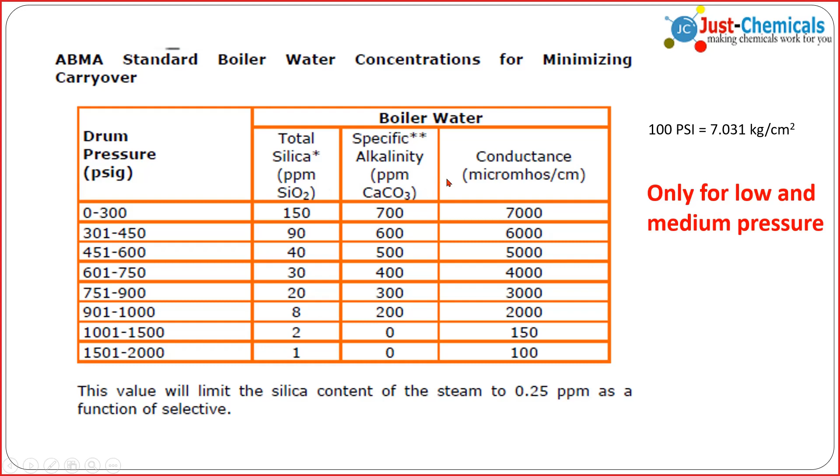But I prefer to follow EPRI - I'll go to EPRI, I'll show you. This is the ABMA standard, the American Boiler Manufacturer Association standard, only for low and medium pressure boilers. These are the PSIs mentioned, and these are the boiler water specifications.

And this is obsolete - the IS standard 10496 was made in 1983 and was never revisited by anybody. I don't know why they never gave enough consideration to the boiler feed water, but the boiler inspector will very well come, check everything, and eat money. Sorry to say it bluntly like this, but the truth is there - that IS specification should have been revisited, revalidated, and republished. As per our system, it is now obsolete.

Okay, there are two kinds here - one is feed water at economizer inlet, and another is boiler water and condensate. All three were published, but never revisited. This is the EPRI guideline for less than 105 kg per centimeter square.

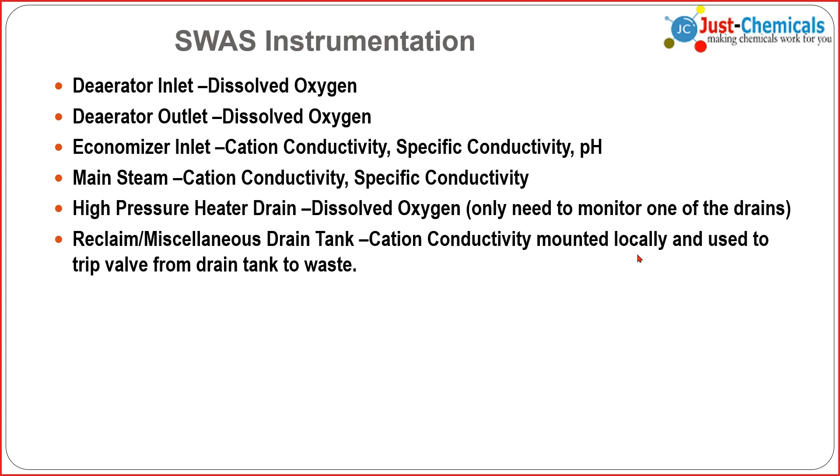SWAS instrumentations are important for deaerator inlet, outlet, economizer inlet, main steam, high pressure, heater drains as well. And this is your reference chart which you need to go through when you get these slides.

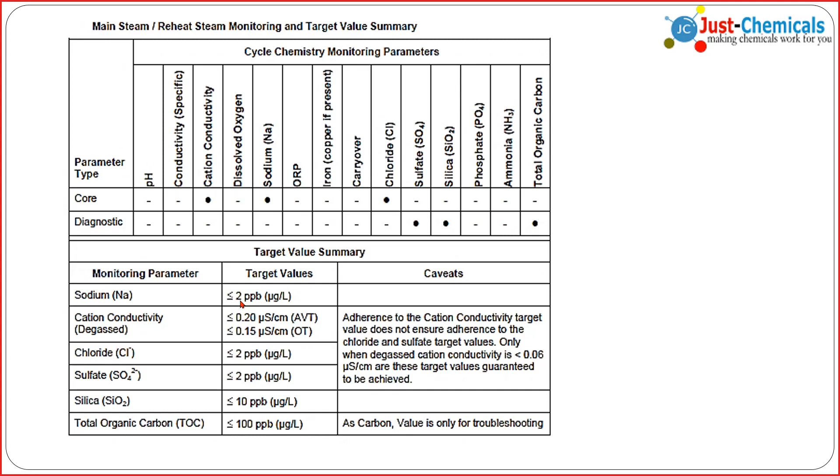If answer is yes, I congratulate you, you are doing a very good job. Now, main steam and reheat monitoring, these are the standard reference slides. Now, symptoms indicating likelihood of scaling inside the boiler. What will happen when there is scaling inside the boiler? The first thing that will happen is the flue gas temperature will go higher.

There will be an upward trend in the flue gas temperature over weeks or months. And if you do a visual inspection of the boiler tubes when the unit is shut down for maintenance, scale removal can be achieved by mechanical means or acid cleaning. Mostly people go for acid cleaning, normally using inhibited HCl plus 1% ammonium bifluoride.

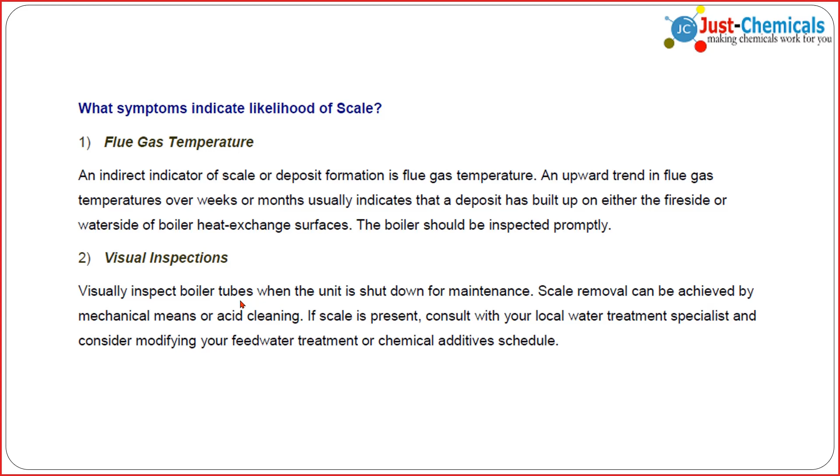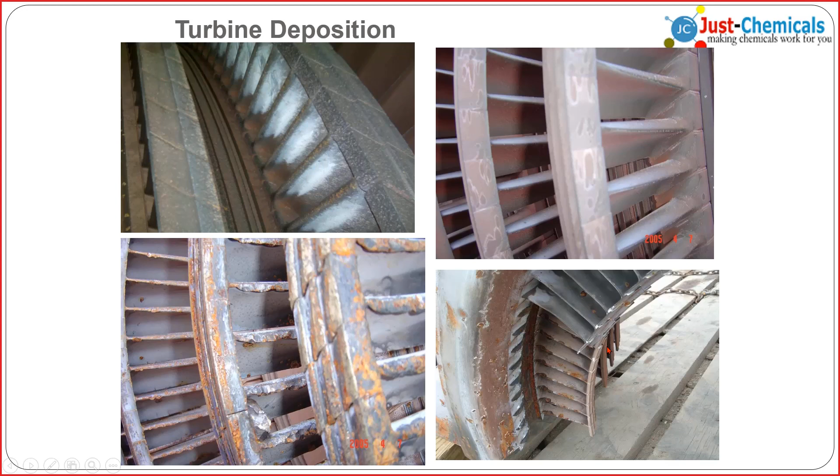So in steam chemistry, you need to control sodium, you need to control chloride, you need to control sulfates. These are very good things required. Sodium you can monitor using a sodium analyzer, either offline or online. Chlorides and sulfates can be indicated with cation conductivity.

So these contaminants, if they go along with the steam from the boiler, can cause stress corrosion cracking or corrosion fatigue in the turbine blades. In corrosion fatigue, it can assist the process a little more because environment is one of the factors, since corrosion fatigue can anyway happen due to cyclic operation, through several load fluctuations, load throw-off and again load gaining. So that will always cause corrosion fatigue, but presence of chlorides and sulfates will assist this corrosion fatigue to happen faster.

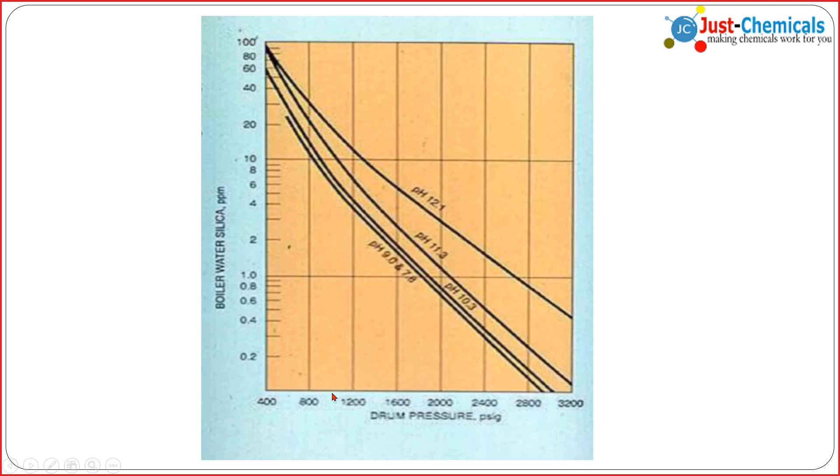Now here is a graph for you to see, boiler water silica versus pressure. You can always ask your operations team to increase the pressure according to the boiler water silica. If the boiler water silica is, say, 10, and you are having a pH of say 9 to 7.8, or somewhere around here, you cannot go beyond 1000 psi pressure. Okay, psi you can always convert into kg per centimeter square.

Now about CPU, some plants are having condensate polishing units, and some plants specifically who are having air cooled condenser are also having condensate polishing units, because there are a lot of chances that iron is getting picked up from the air cooled condenser and coming into the system.

So CPU is normally of two kinds. One is with in-situ regeneration, like MB in-situ. There you can regenerate, but that can act bad sometimes because either caustic or acid, if remaining in the resins, goes into the steam water cycle. The other one is an offline system, where you take out the resin hydropneumatically, pump it into another vessel, separate them, do the regeneration, mix them, rinse them fully, and then put it back into the CPU system.

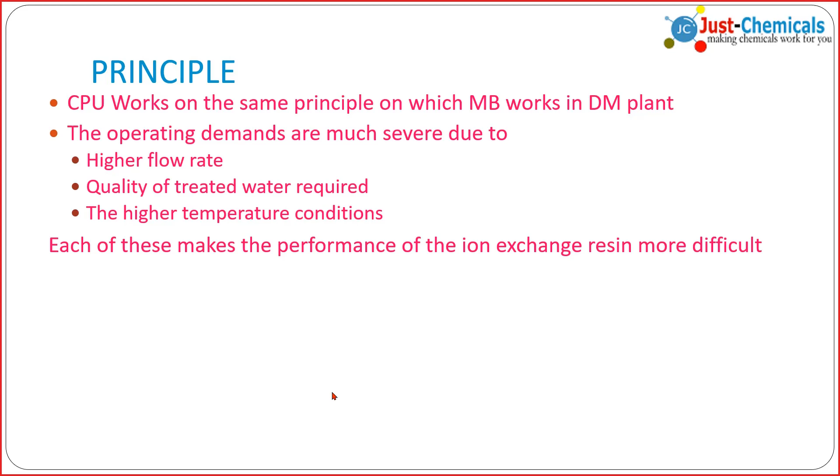But these are the same ion exchange resins, just having higher capacity, as they should be operating at higher flow rate, can treat the water required, and can withstand higher temperature conditions.

And about the treatment, there are three different treatments available. One is AVTR, which you are following. AVTR plus PT is what you are following, and that is okay all the way. Using amines or carbohydrazide is actually not good.

And you should be maintaining an ORP, oxidation reduction potential, of minus 150 to minus 250. An ORP meter is very handy, comes around 5,000 rupees only. You can always purchase and use it, and there are so many companies supplying these ORP meters.

Oxidizing treatment systems have now started coming up in India. Mostly Adani's and Jindal's are transforming, and they have started transforming. NTPC has transformed many and is still transforming into AVTO, where they do not use a reducing agent and maintain a positive range around 0 to plus 50.

But this possibility can happen when you are having your DM water with 0.15 cation conductivity, number one. Number two, you are not seawater cooling water system, you have a normal cooling water system. And if you are having a polishing unit, that will be an added advantage to go into AVTO, because any contamination can damage your pipelines to a higher extent. Then the third one is oxygenated treatment.

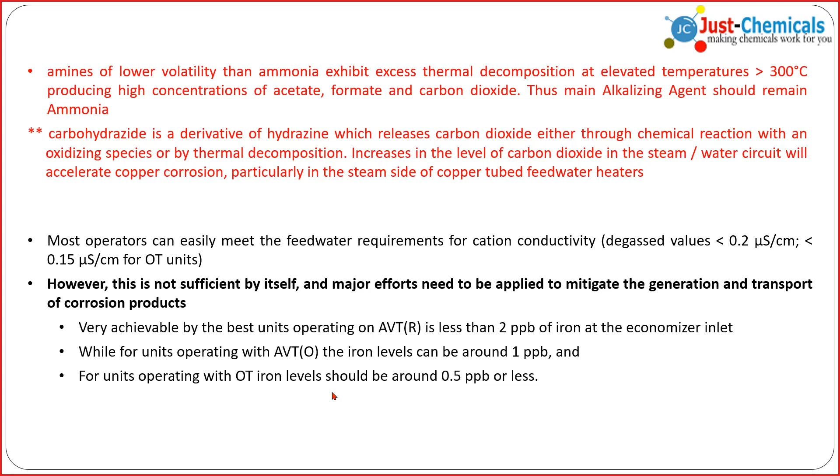So in AVTR, the iron at the economizer inlet should be less than 2 ppb if you are operating well. A unit operating with AVTO is around 1, and a unit operating with OT, oxygen treatment, is 0.5. So higher purity water, where the degassed cation conductivity is less than 0.2 and sodium is less than 2, is not only critical to control corrosion in the feed water, but it's also better.

So it's almost 17:42, we don't have much time left. We'll talk about the PTZ zone. I've already told you about PTZ.

It is called phase transition zone, where you are operating more than the desired vacuum. If your designed vacuum is 0.91, and if you are exceeding 0.91, going to 0.92, 0.93, you are placing that phase transition zone from the condenser into the LP turbine itself.

In the condenser, the phase transition should happen, the steam must condense into water by releasing that latent heat of evaporation. But by running at higher vacuum, you are forcing that phase transition to happen in the LP turbine itself. And when the phase transition zone happens in the LP turbine, the water droplets will have 200 times more concentration of contaminants like chlorides, sulfates, or carbon dioxide, and that will damage the LP turbine.

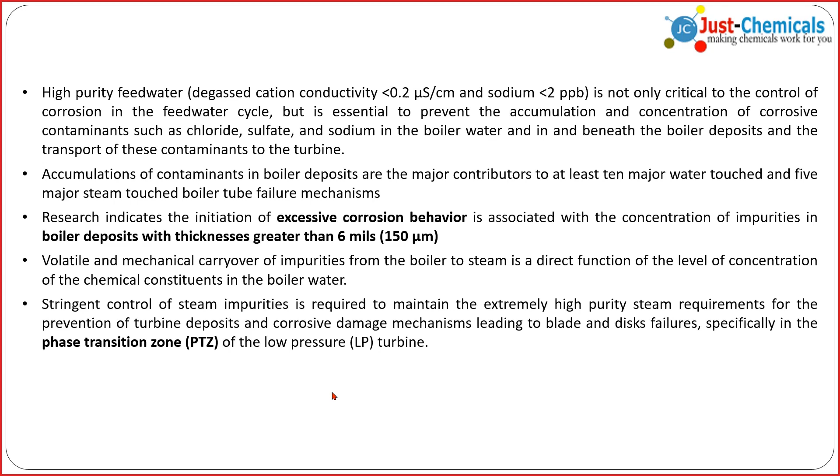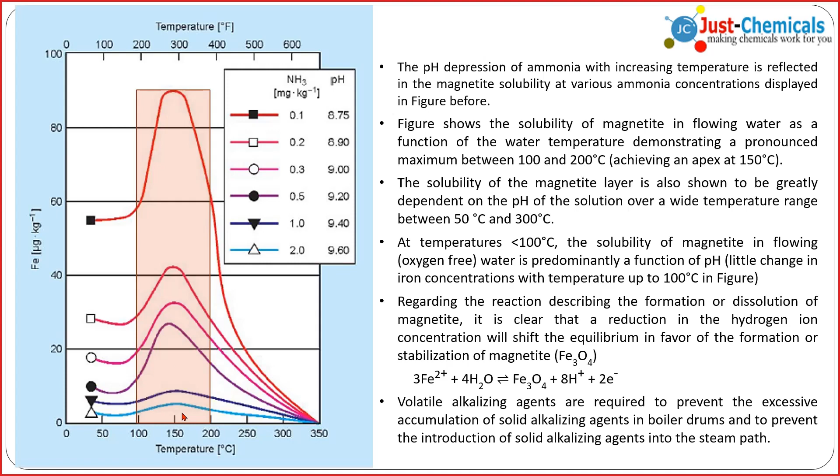Now, temperature has an effect. Here is the temperature, and here is the iron. You see this temperature range where your magnetite forms, but it can get dissolved. This also you must remember. All these are reference slides which you should go through whenever you have some time in hand.

For all-volatile treatment, if you are having copper in the system, then you should establish an ORP of minus 150 to minus 350 depending on the metallurgy. The AVTR application target pH should be 9 to 9.3, as I've shown you in that table.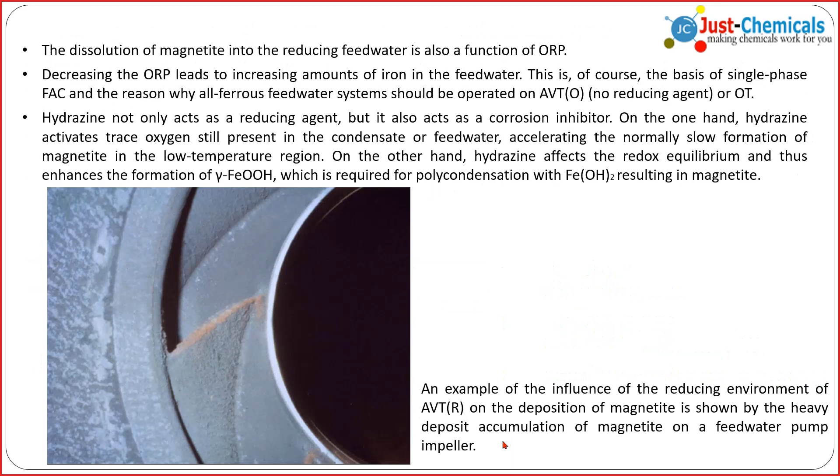Others are all your reference tables, reference slides which will help you understand more. I cannot take more time than what is being allotted. Okay, this is where you have to be in the boiler, and I request you to be there. And these are some hideout things being mentioned.

Phosphate hideout reaction happens in three types. One is maricite, another is SiHP, meaning sodium iron hydroxyphosphate, and third is precipitated sodium phosphate. All these three have different conditions, meaning the pH will be different, and in return the pH will be different.

All these are mentioned in this chart. Here are the three, if you remember: maricite, SiHP (sodium iron hydrogen hydroxyphosphate), and third is precipitated sodium phosphate. This one is precipitated sodium phosphate. The difference in these three is mostly the pH.

When the hideout happens with maricite, the pH increases, and during the return the pH decreases. With sodium iron hydrogen hydroxyphosphate, SiHP, during hideout the pH reduces slightly. It was 9.2, it will reduce slightly, and in return the pH will increase. And if it is precipitated sodium phosphate, then pH will decrease drastically during hideout.

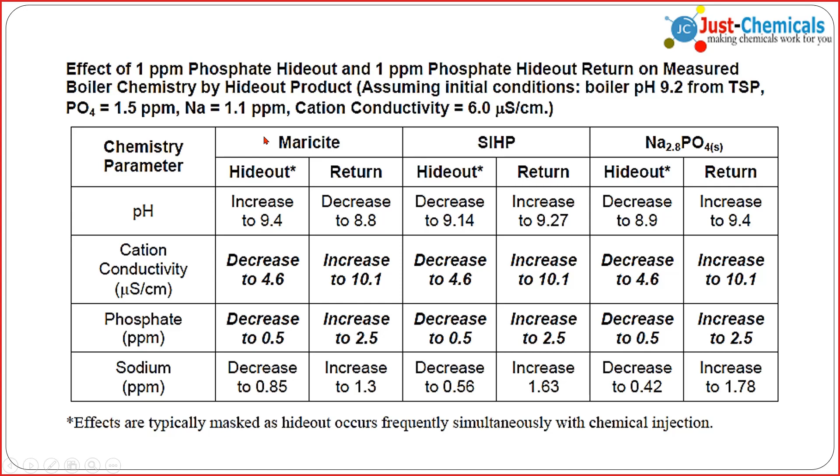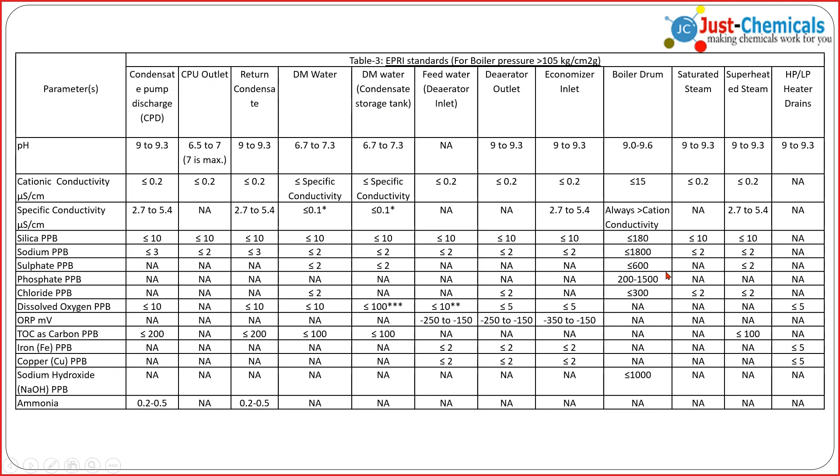To control them, EPRI had come with phosphate limits: lesser than 105 kg, phosphate limit is 0.2 to 3.6, and higher than 105, phosphate limit is 0.2 to 1.5. This has controlled all the three phosphate hideout mechanisms properly.

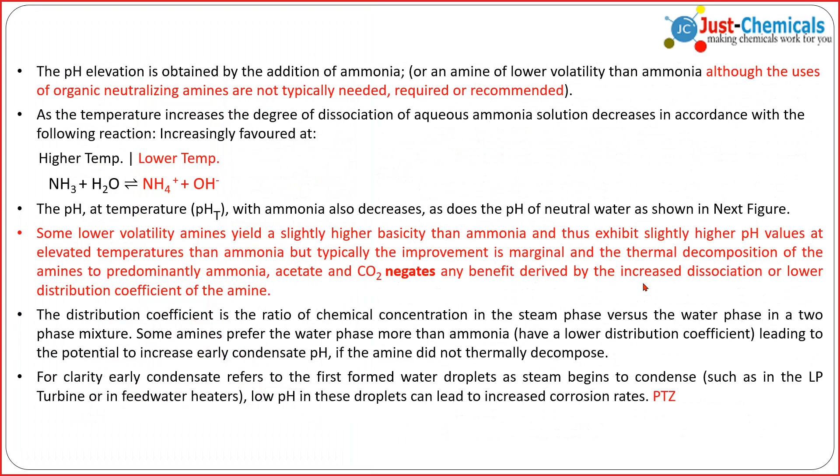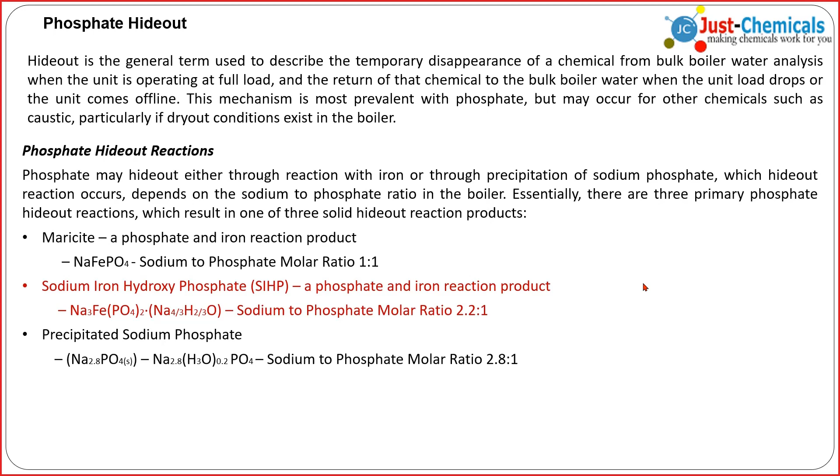When the phosphate hideout happens, please do not add more phosphate into the system in any case, because phosphate hideout happens because of the thickness of your magnetite layer. If you reduce the thickness of your magnetite layer, you will be able to achieve the desired results. When it is uncontrollable, please go for a boiler acid cleaning.

Right? So here is another chart.

Can you wrap up in 10-15 minutes, sir? Pardon? Can you wrap up in 10-15 minutes? I know that you are having lesser time, and that is why I am just trying to wrap it up.

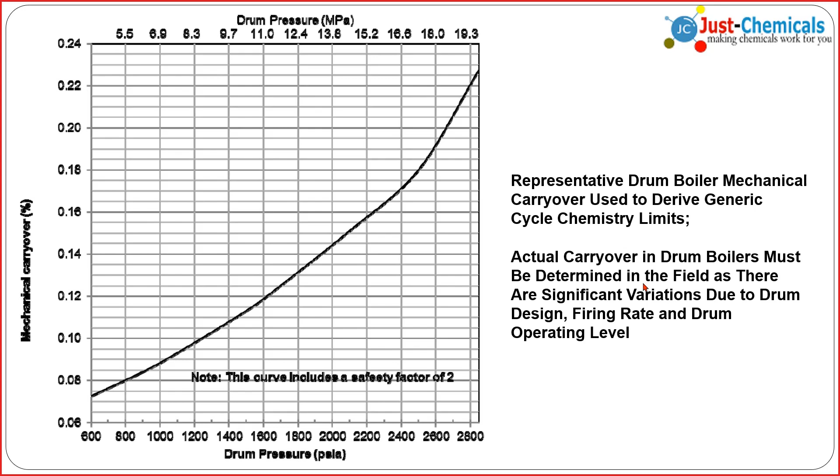Okay, fine. Right? So mechanical carryover is one which you should know. See, all these are reference slides now for you. There are many reference slides which you should go through and inform me.

There are two slides importantly which I must mention: if your water is free of CO2, then even 0.5 ppm of ammonia will let you take 9.2 pH, if you are having carbon dioxide free water.